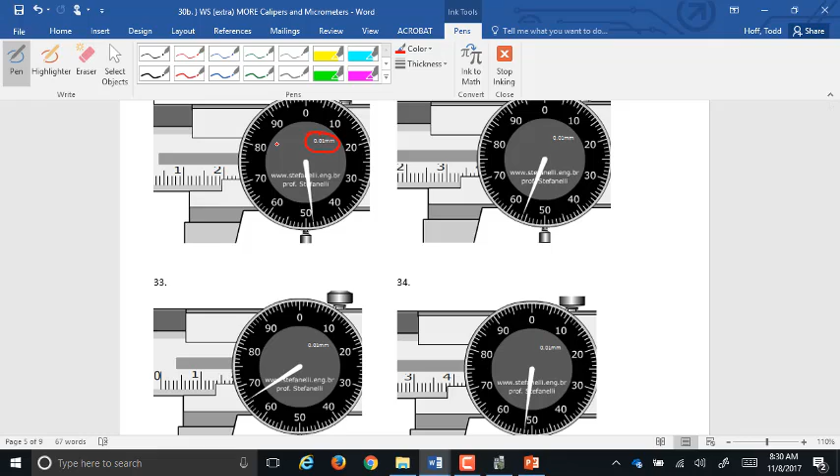Now remember, the tricky part about the metric caliper is that is not 1. What does that really stand for? 10. So here's our reference edge. That's where we're reading that main scale. That's 10, 15, 16, 17, 18, 19. So that's 19 whole millimeters.

And I don't know what just happened there.

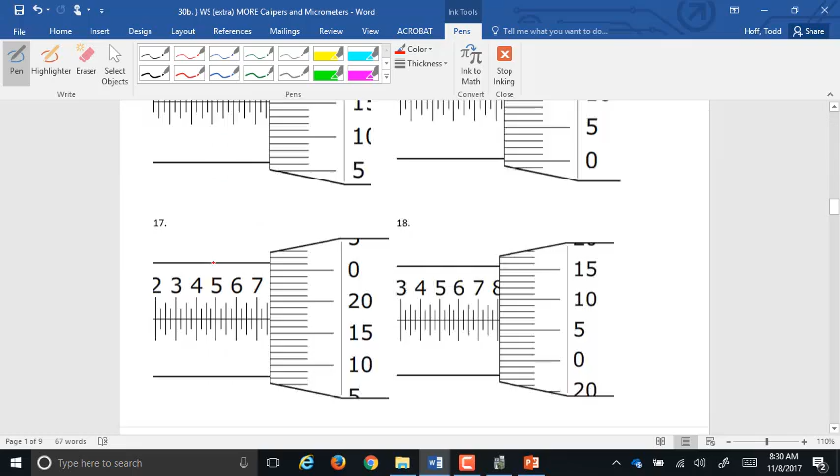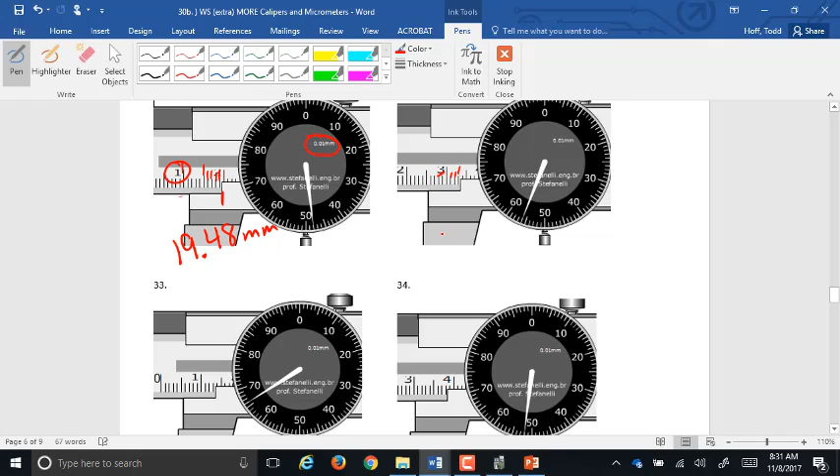19 whole millimeters. Point. What does it say on the dial? 48. So 19.48 millimeters. So this second one, that's 30. 1, 2, 3. So 33. Point, the dial says 56. So 33.56 millimeters. How about this one down here, number 33?

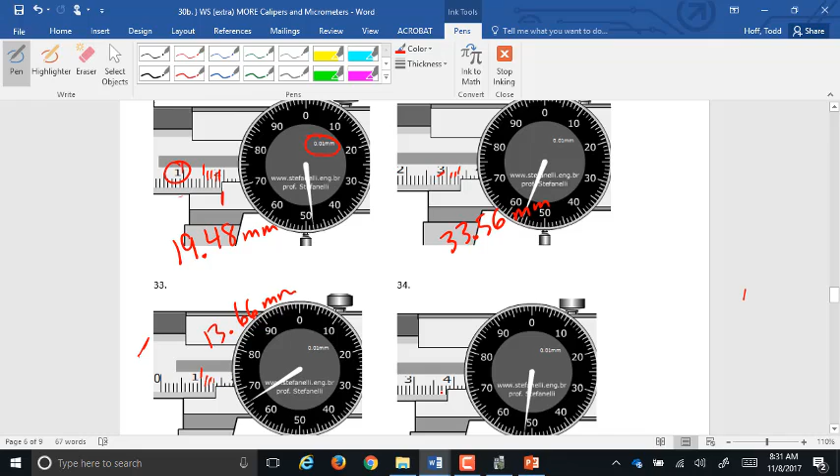13.66. Perfect. This is 10, 11, 12, 13.66. 34? 38.52. Perfect. Well, then we're going to move down a bit. Now you can probably guess that these are not metric anymore. These are inches. That says, again, if you can see it, 0.001 inches is what that says. I'm going to give you guys a minute or so to read those four, and then we'll talk about them.

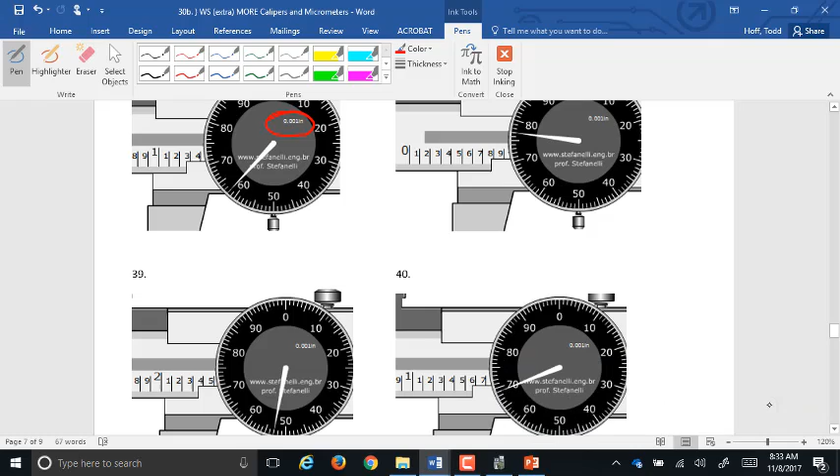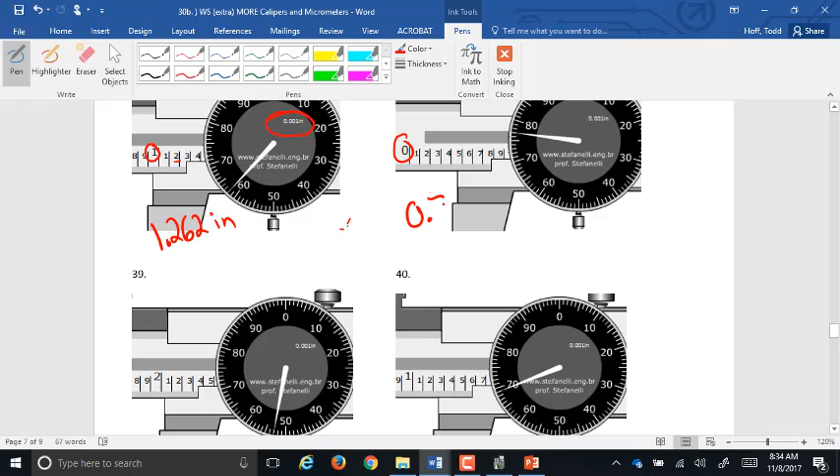So for the first one, reading in whole inches, this is 1 whole inch, point, that's the tenths, 2, and then the dial says 62, so 1.262 inches. Over here on the second one, how many whole inches? 0. Point, past the 7, and then 77, so 0.777 inches.

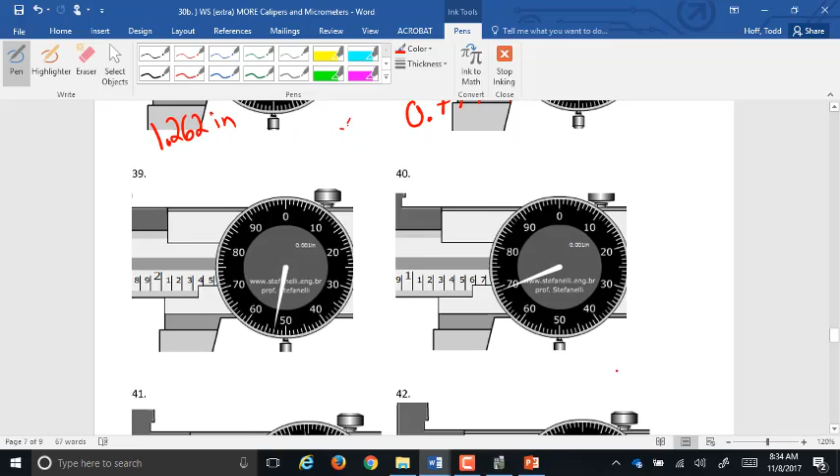I'll put these up so we can see them a little better. Oops, that's the wrong direction. Okay, so number 39 here, how many whole inches? 2 whole inches, 2.353, so 2.353 inches. 40. 1.5 and then 69, so 1.569. Any questions on reading those calipers? Okay.

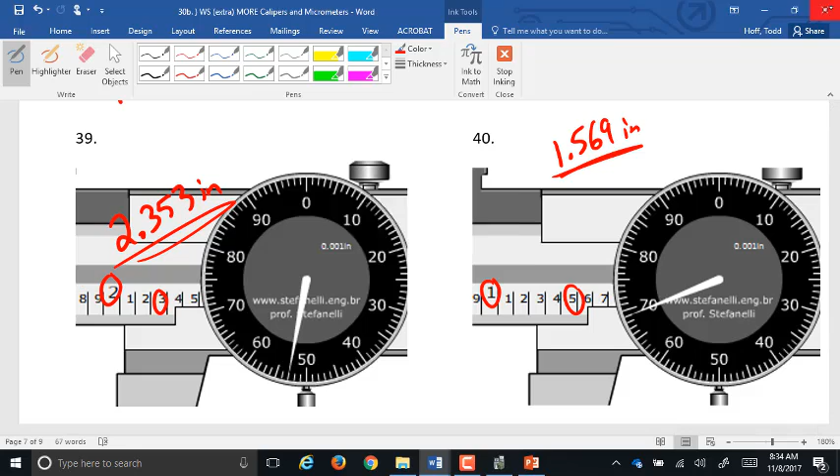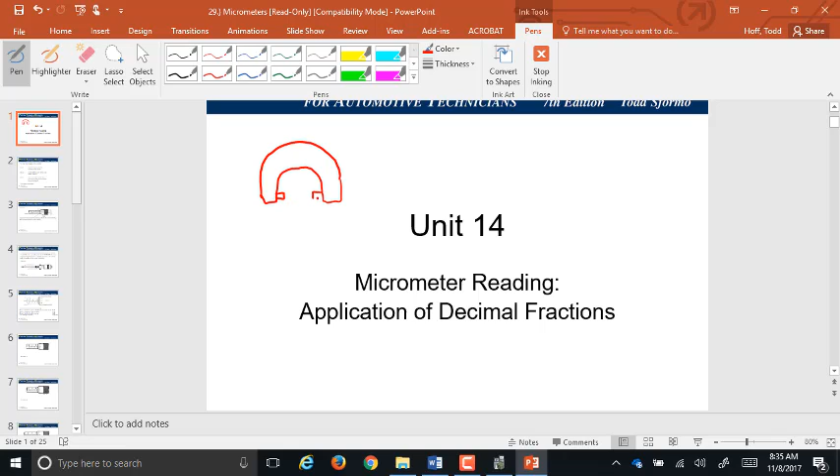Well, today then we're moving on to reading micrometers. Micrometers are kind of like a big C-clamp. Don't use them as that, it's not good for them. They look something like this. That's what our micrometer looks like. We have the jaw or the arm of the micrometer up here. This is stationary here. This part moves in and out as we turn the part out here. This out here has 2 pieces to it.

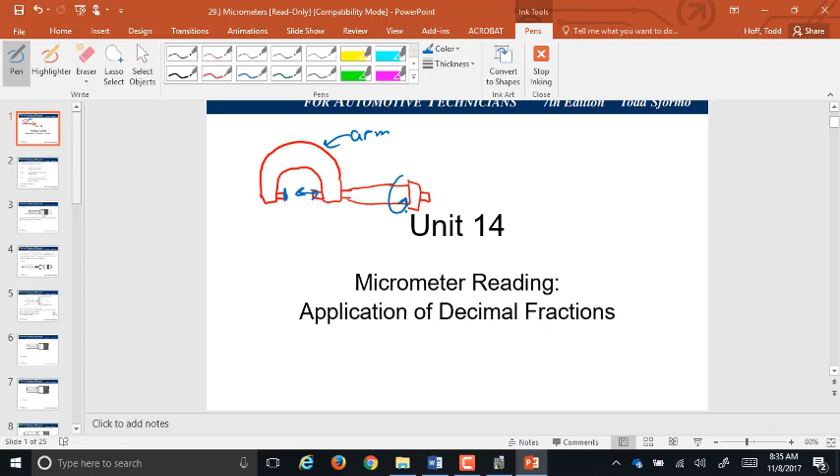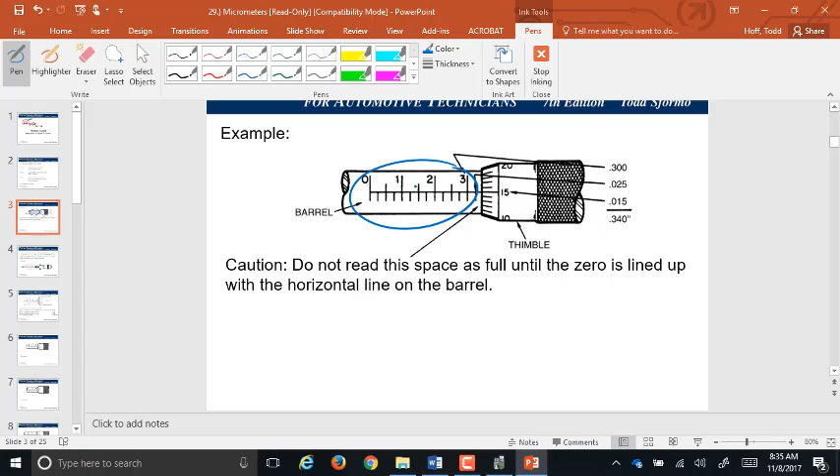There's the barrel. Oh, we can do this. There's the barrel, which is this part here. That stays stationary. That's going to lock onto the jaw, onto the arm. And then the thimble is this part here. That's the part that actually spins. As that spins, it slides in and out on the barrel. And as it spins, it moves this piece in and out as well.

So there are going to be 2 measurements we need to take here. We get part of our measurement. Actually, technically, there's 3 measurements we should take. Most of these are labeled 0 to 1 inch, if I'm looking at an inch micrometer here. That 0 to 1 inch means that this will never measure anything larger than an inch. Now there are going to be some that say 1 to 2 inches and 2 to 3 inches, and we'll talk about that in a little bit.

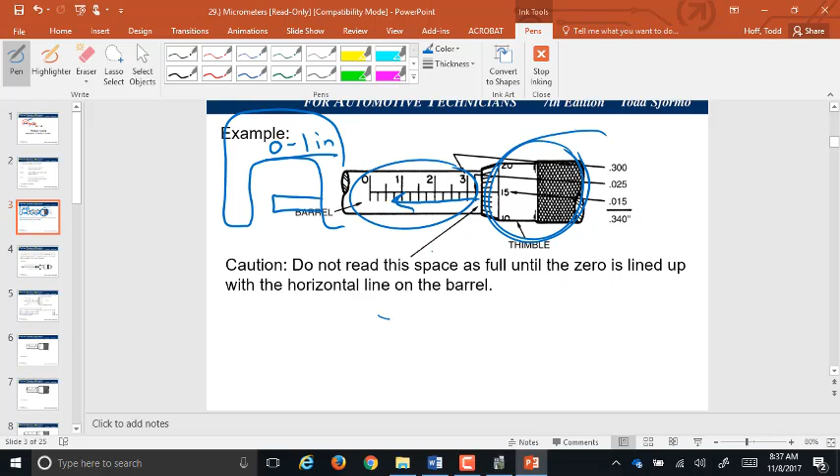This thimble, when we turn it, it moves in and out. One full turn is a 40th of an inch. So you have to make 40 complete turns to move an inch. Because of that, it's very slow to move it in and out, and they almost never have them with more than 1 inch of travel in them. So this will almost never be more than an inch. I have seen some that go 2 inches, but they're extremely slow. In fact, one of them I saw actually had a crank on it to turn it faster. Most of the time, they only have 1 inch of travel because of that slow movement.

Now, like I said, this one is a 0 to 1 inch, which means it would close tight here, and it would open up as far as 1 inch. If I had one that was labeled 1 to 2 inch, what that means is when it's completely closed, there's still a 1 inch gap here. And if it were totally open, it opens as far as 2 inches. So it's only able to measure things that are larger than 1 inch and smaller than 2 inches. And then, of course, they have 2 to 3 inch, 3 to 4 inch, and so on.

We take the first part of our reading off of the barrel. We read it at the edge of the thimble. Now, remember, we said this is 0 to 1 inch, so these numbers are not whole inches. Those are tenths of an inch. So this here is 0.3 inches.

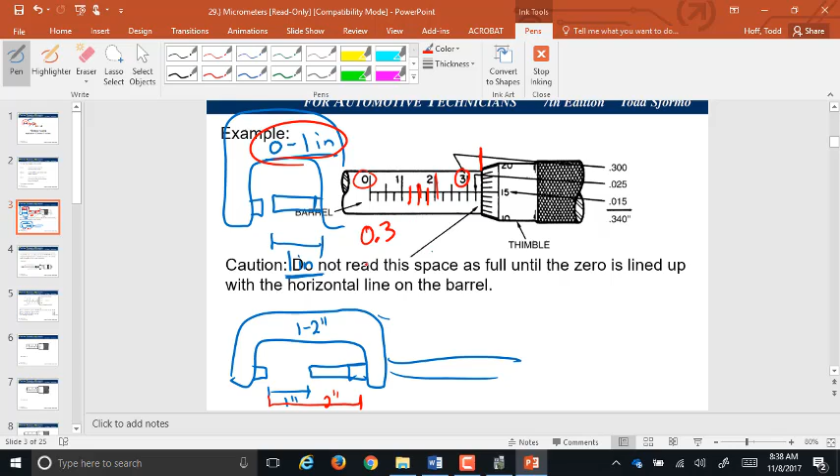Now, we looked at that vernier caliper just a little bit yesterday. That vernier caliper had quarter marks, the 3 marks in between the tenths. All inch micrometers have those quarter marks. What that is saying is this is 25 thousandths, 50 thousandths, and 75 thousandths. So here we have passed the 3 tenths. We have passed one of those quarter marks. That is 25 thousandths. So that's 0.3 and then 25. That's what we read off of the barrel.

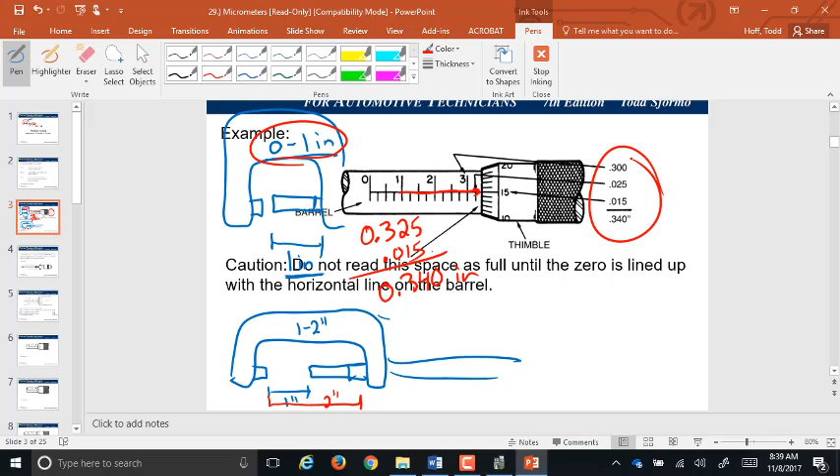Then we read the thimble. The thimble gets read where it lines up with this axis of the barrel. Right now you can see that's a 15. That's 15 thousandths. You would add that up, you get 340 thousandths of an inch, just as they did over here. So let's practice some of these.

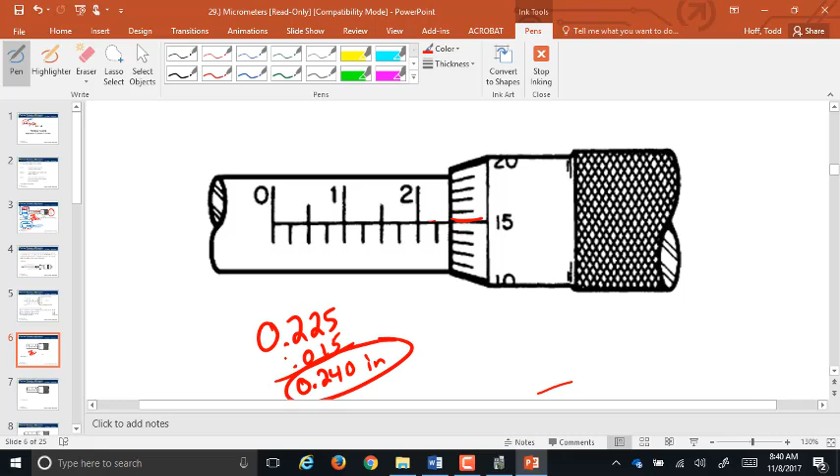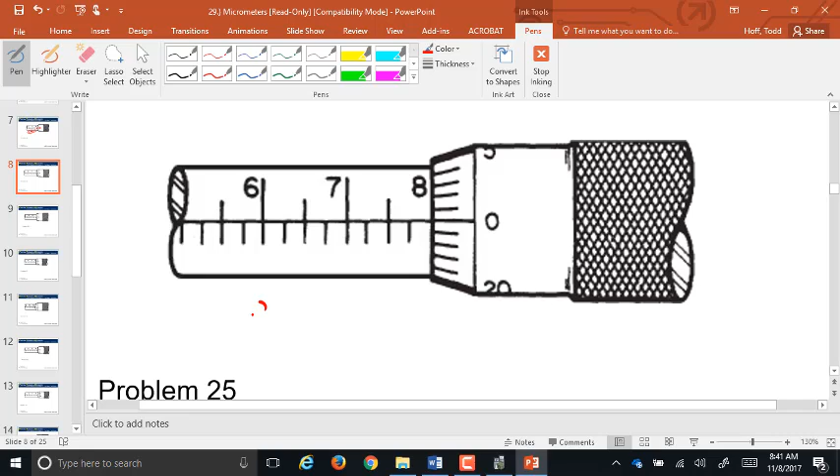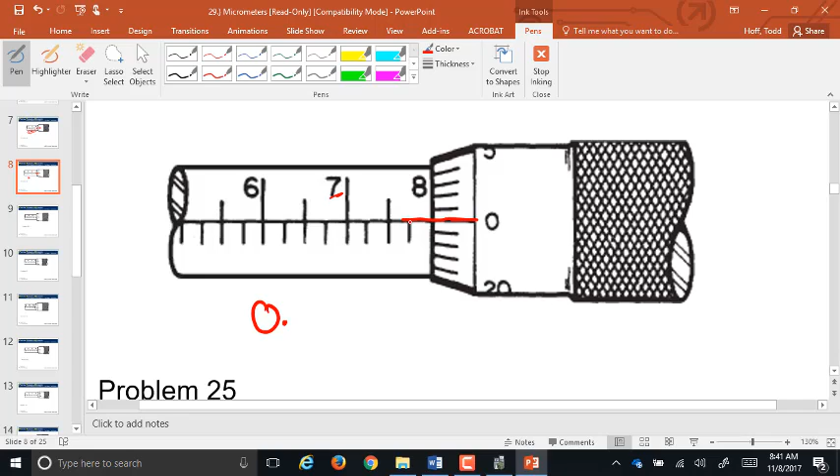So here, 0 whole inches. Now we're obviously past the 7. Have we made it to the 8? Well, once again, we're exactly on 0 here, so that means we're at one of the lines, so we must be exactly at 8 tenths, 0.8. Do we need these zeros on the end? Yes, we do. So that whoever is reading that measurement knows that we really did measure to the thousandths of an inch, and it happened to come out closest to 0.8 to the nearest thousandth.

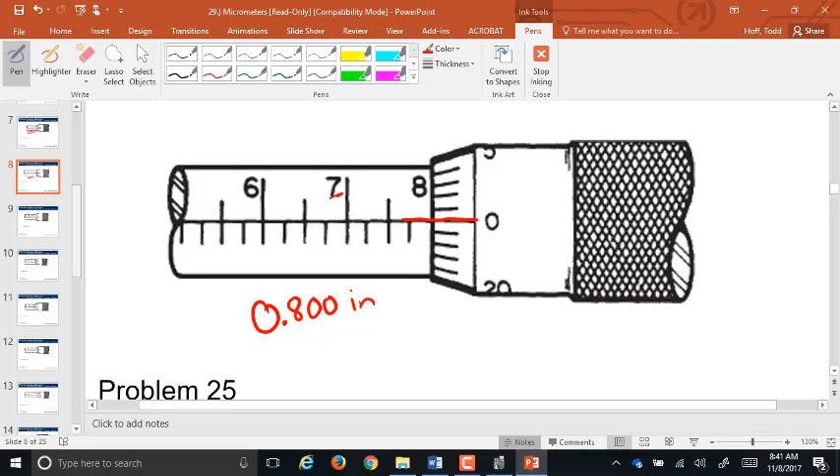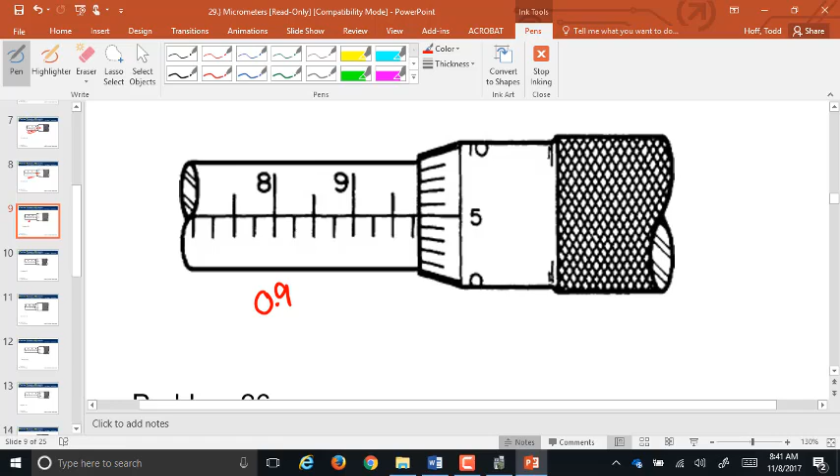Okay, let's make them a little more interesting here. This one, how many tenths? So 0.9, and then 25, 50, 75. So 0.975. And then we read the thimble at what? 5 thousandths, 0.005. So we add that up, that's 0.980 inches.

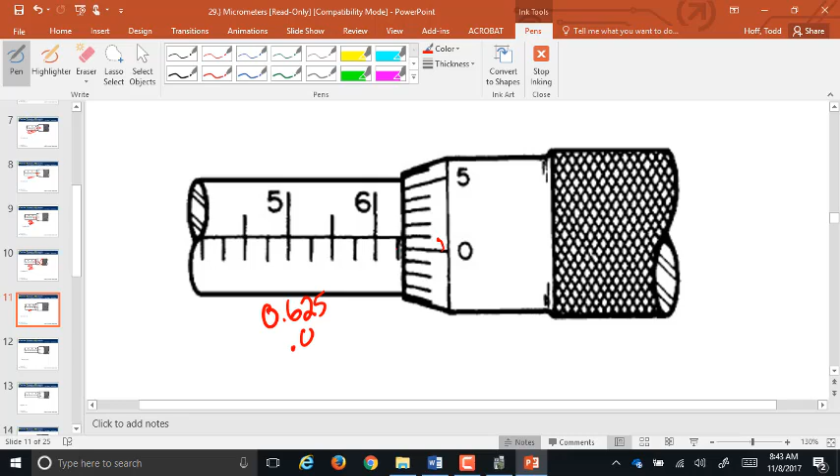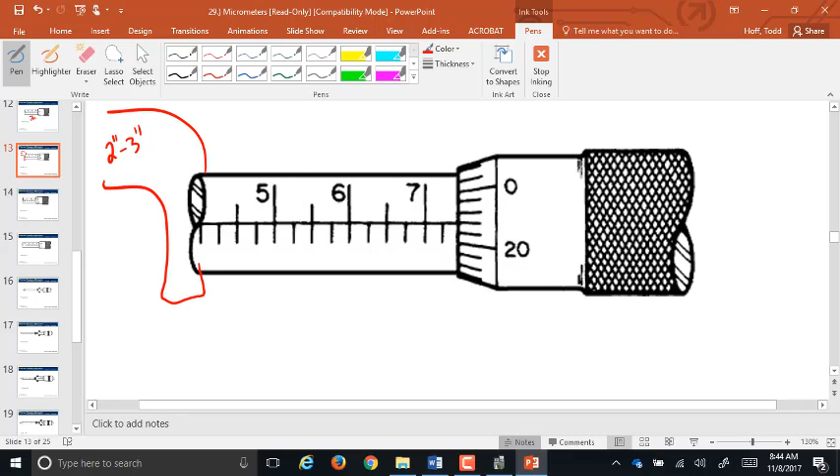Now in this one, I'll say it's labeled 2 inch to 3 inch. So what that means is our measurement starts out as 2 whole inches. Then we read how many tenths? 7, 25 because we're past a quarter mark. Then off the thimble, 22 thousandths. We add that up. It's 2.747 inches. Now remember, the 2 only comes from the fact that I told you it was a 2 to 3 micrometer.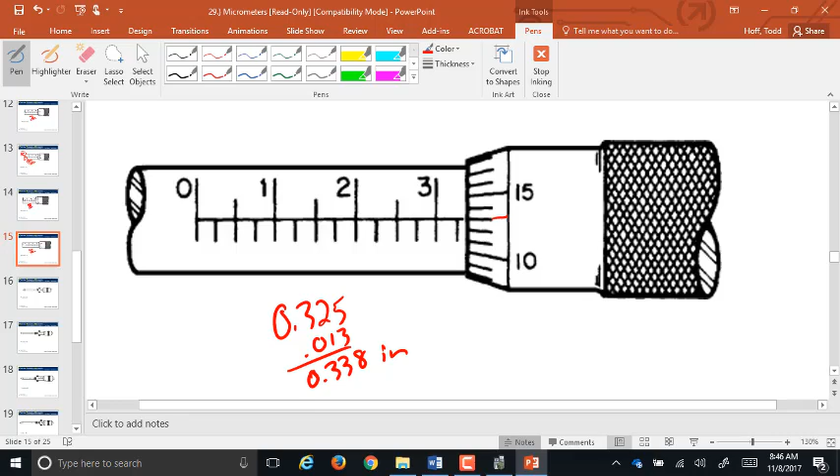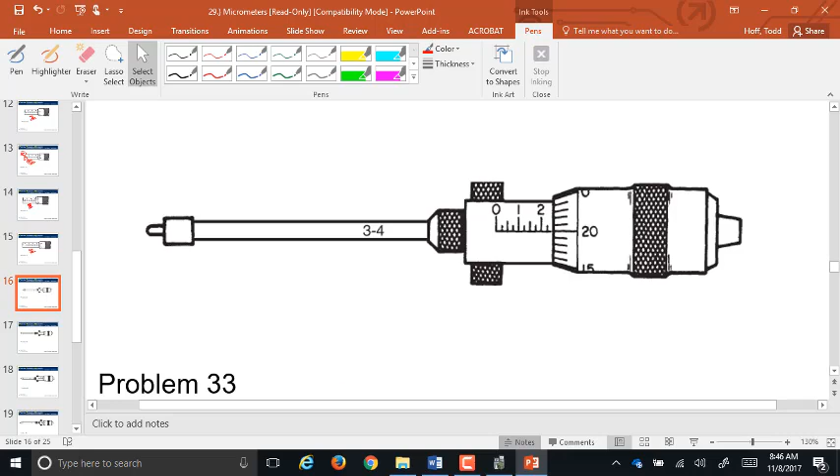Now the micrometer, because of its structure, can only measure outside dimensions, outside diameters, with a standard micrometer. The caliper, if you remember from yesterday, had 4 different ways it can measure. It can measure outside, inside, step, or depth. To measure inside dimensions or depths, we do have an inside micrometer. Now, the inside micrometer, you'll notice, first of all, it has this on it. That is an extension. That 3 to 4 inch extension means that any measurement I take with it is going to start at 3 inches. What's that?

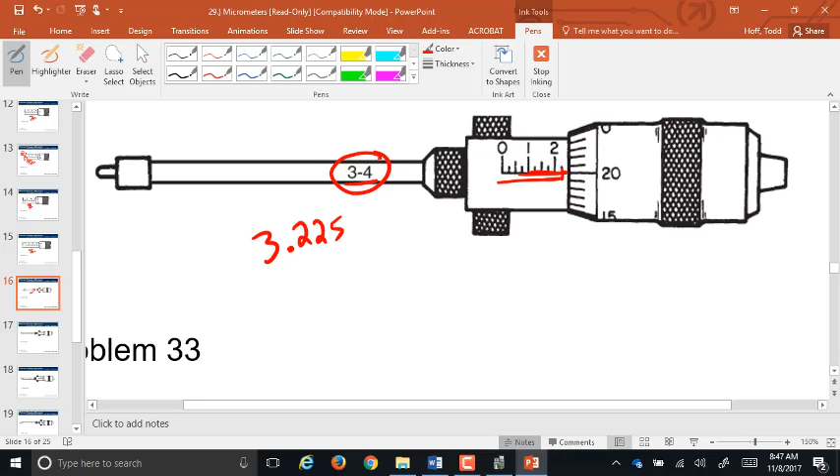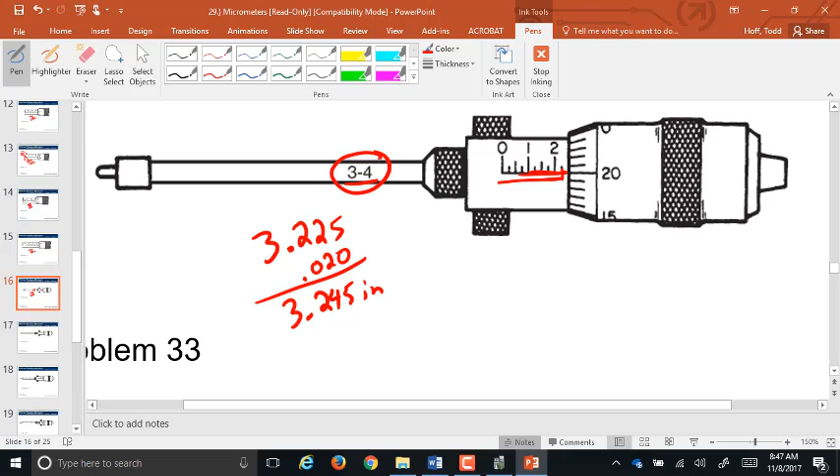Then we read the main scale the same as we always have. That is 0.225. And then we read the thimble. What's lining up on the thimble right now? 20, so it's 20 thousandths. This is 3.245 inches is the depth that's reading. Now this one you'll see looks similar, but slightly different. I'm going to flash back. What do you see that's different between these two?

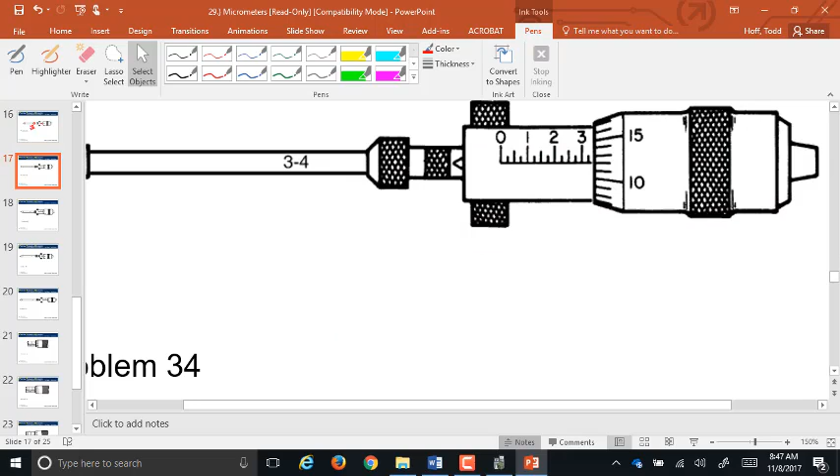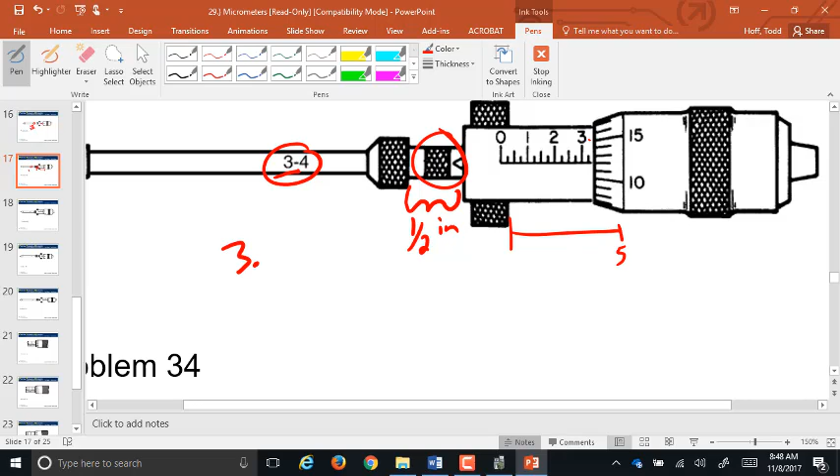It says 3 to 4 inch, but there's this piece here that isn't there, is there? That is a 1/2 inch extension. On an inside micrometer, in order to keep them smaller and shorter, there's only a 1/2 inch of travel. This would only go up to 0.5 here. So this is saying this is 3 inches and a half. So this one starts out at 3.5 before we start reading the barrel and the thimble. So that means we're going to have to do a little bit more addition here.

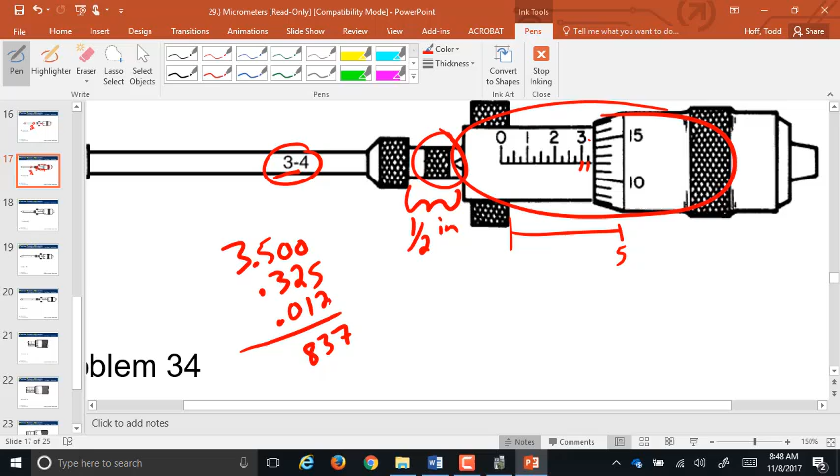What does my barrel read? 0.325? What's my thimble read? 12 thousandths, so 0.012. So then I add up, I've got 7, 3, 8, 3. So 3.837 inches. Any questions?

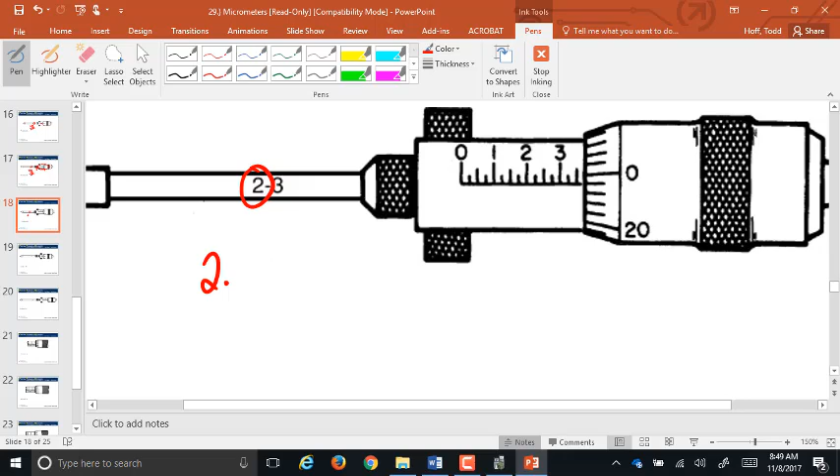So on this one, where do I start? 2 whole inches. Yep, 0.350. Then on the thimble, that's 21, 2, 3, 4. 24 thousandths. 2.374 inches.

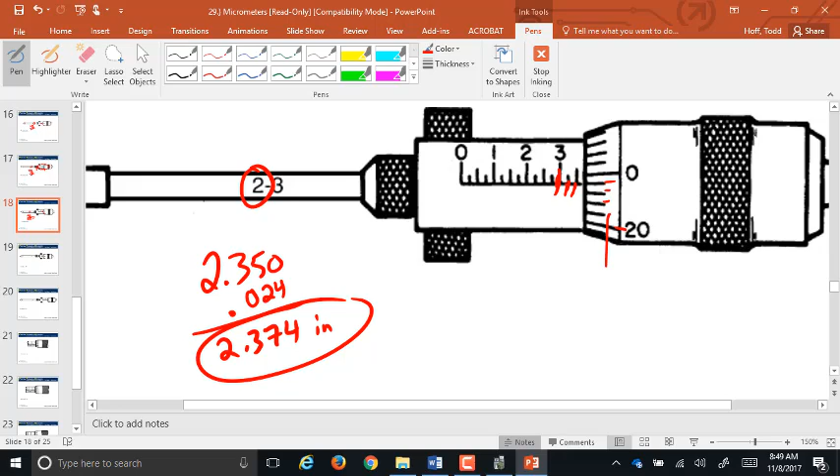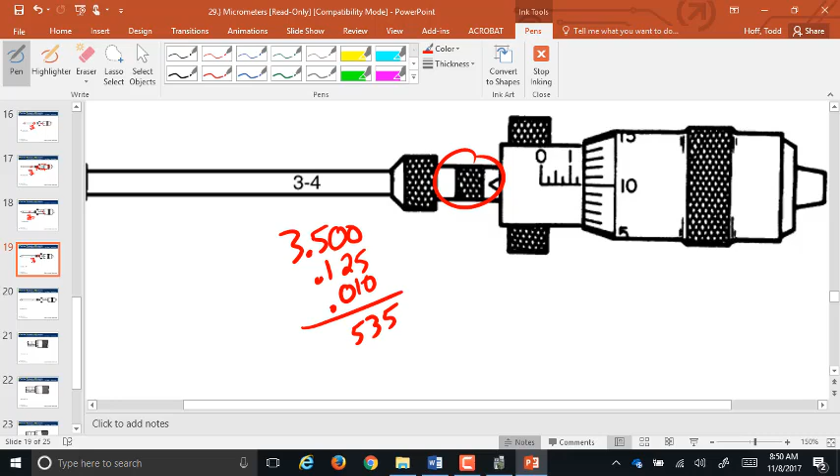How about this one? Where do I start? The 3, and that's an additional 0.5. Then what? 0.1, and it is just 25 again off the barrel. 10. So, oops, that should be a 6. 3.635 inches is what that's reading. Have a try at this one on your own. We'll talk about it in about 20 seconds.

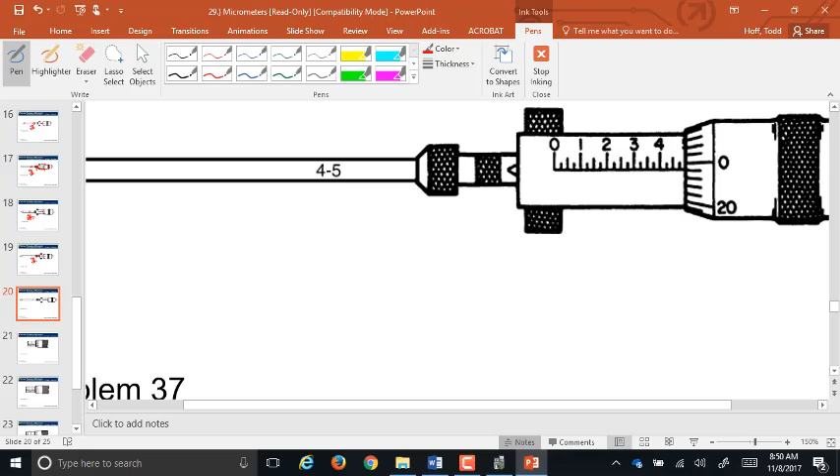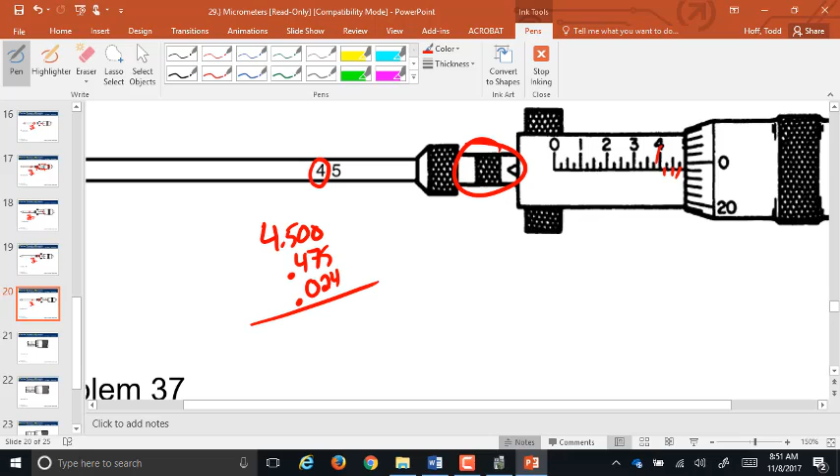So where do we start? 4.5, yes, this is the 0.5 because of the 1/2 inch, yep. Then what? 475, very good. This is the 0.4, 25, 50, 75. And then what? 0.024, 24 thousandths. So that's 4.999 inches.

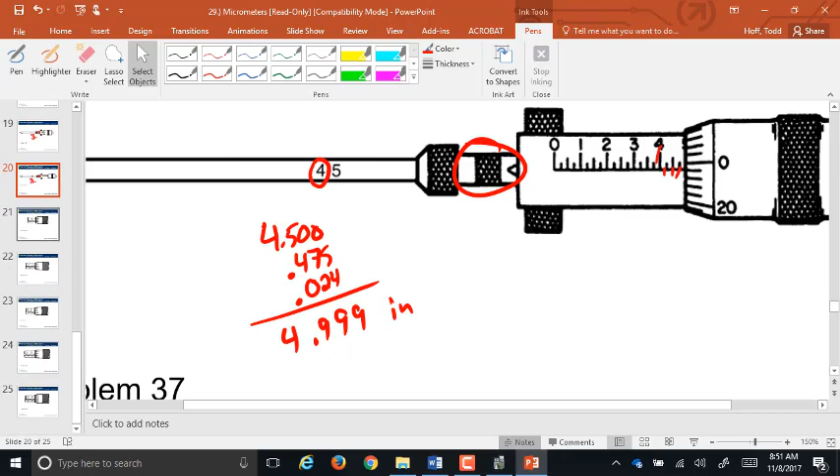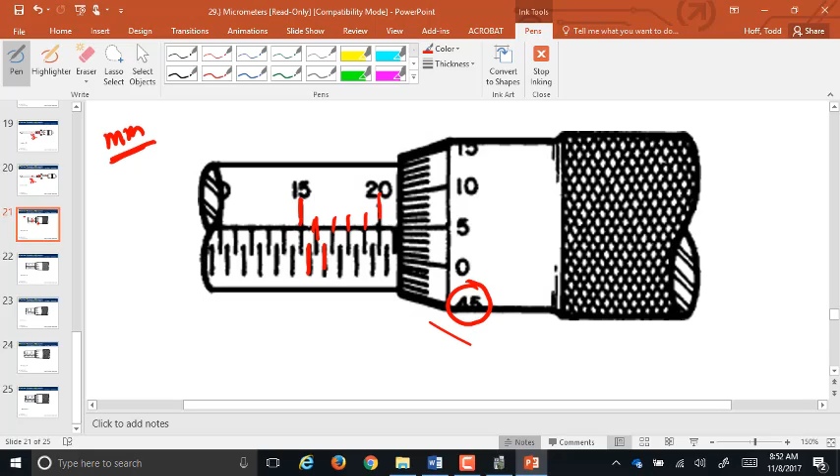You'll notice here, this is 15 millimeters. This would be 16, 17, 18, 19, 20. But you'll notice there's these additional marks in the middle here. Those are the half marks. So this is 15, 15 and a half, 16, 16 and a half, 17, 17.5, 18, 18.5, and so on. So as I'm reading this one, this mark here is the 21 millimeter. Have I passed it? Yes, because I've just passed 0. There's 21 whole millimeters.

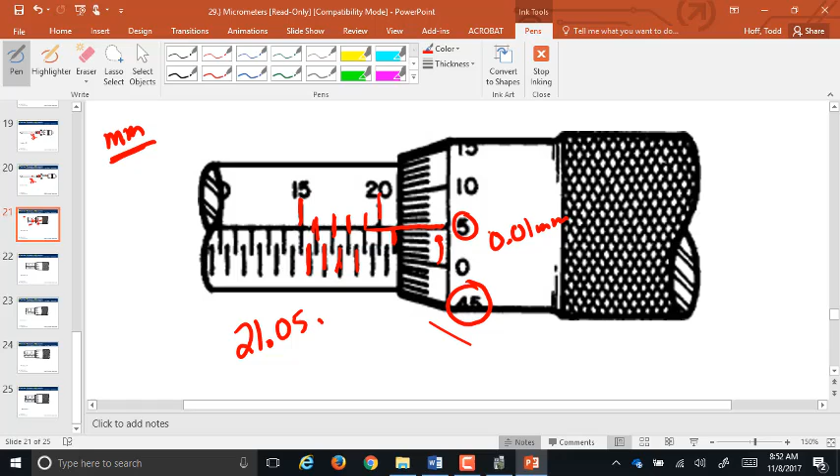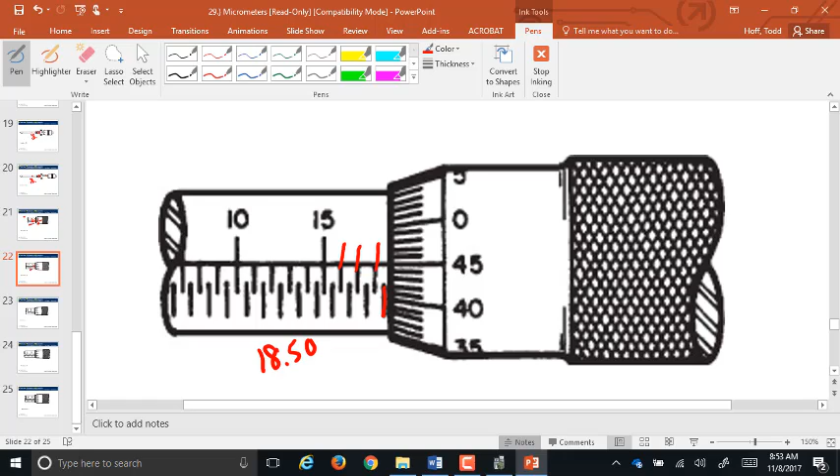Then what do we read on the thimble? 0.05. Very good. Because that is in hundredths of a millimeter. Even though that just says 5, it's 0.05. It's 5 hundredths of a millimeter. How about this one? Well, it's 15, 16, 17, 18.5. So 18.5, yes, and then plus 0.45. So that's 18.95 millimeters.

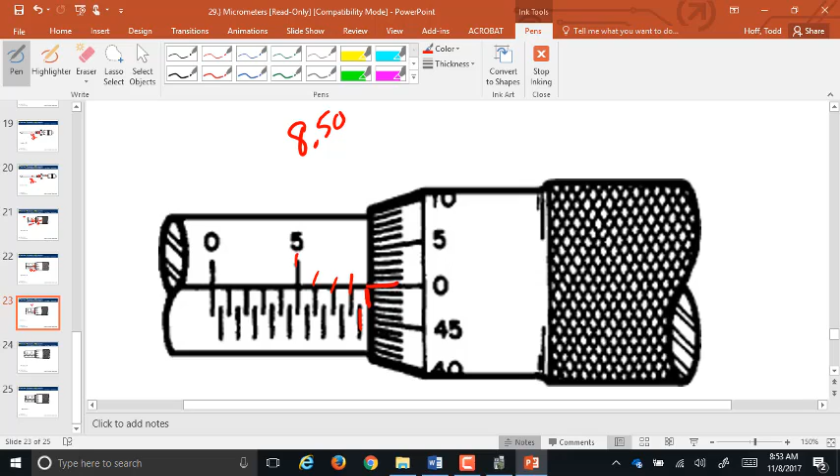How about this one? 5, 6, 7, 8 and a half. But this is at 0 here. So that's telling us we're clearly past the 8 and a half. We're not right on 8 and a half. So we have to be right on 9 is what that's telling us. And yes, we do have to write that as 9.00 millimeters because we are within a hundredth of a millimeter.

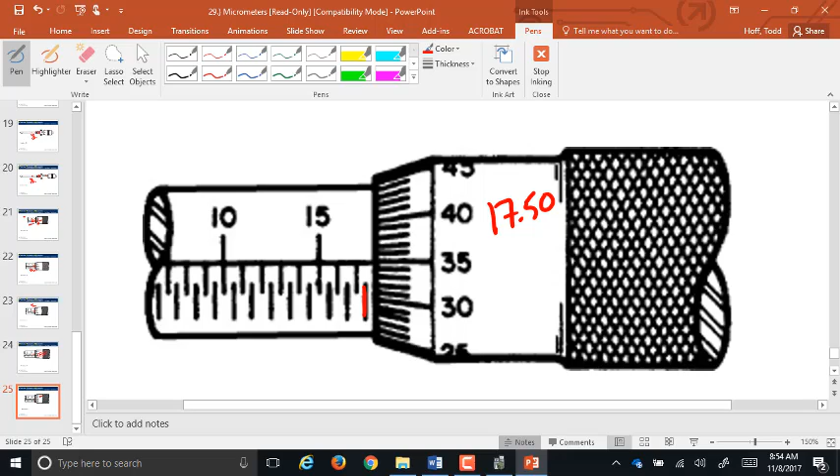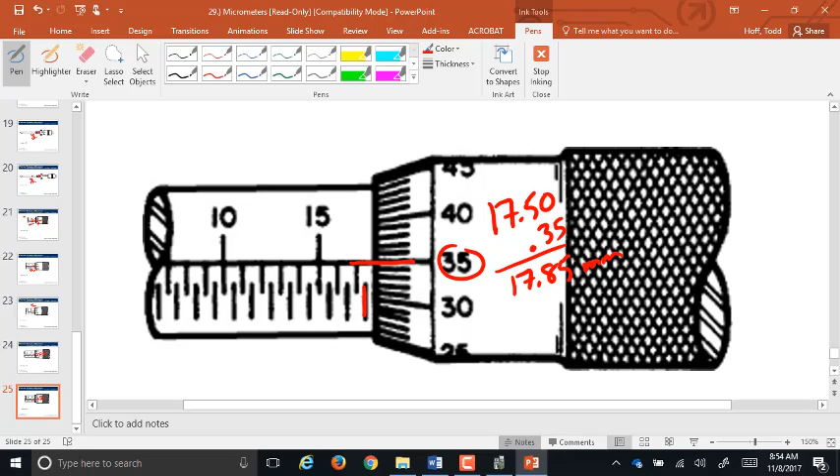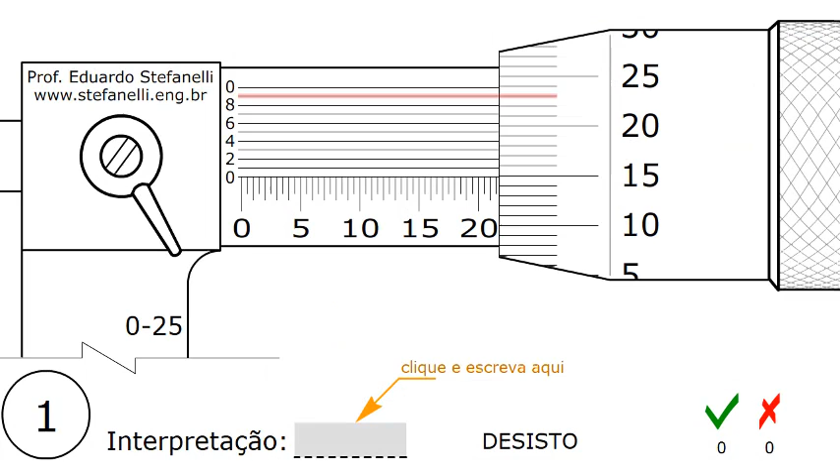I have no idea which one this is going to be, but we're going to try it. Quiz. Whatever the quiz. Oh, come on now. A little bit. There we go. So let's do... that's not the one I want either. How much you want to bet? I'm going to check 4 of them. They're all going to be the quizzes. Oh, there's one I'm looking for.

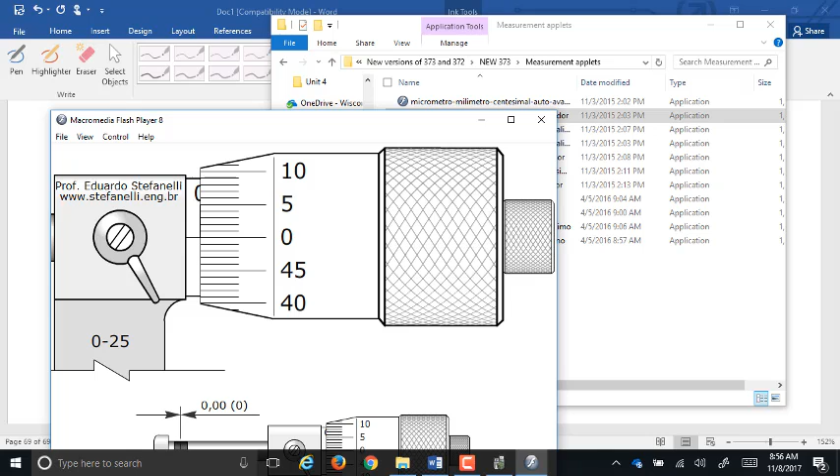Okay. First of all, metric or standard? How can you tell it's metric? It goes up to 45 and back to 50 here before it hits 0. Also, oops, come on. If I roll this out, you can see why they don't have a lot of travel. It's just as slow on a real one. It all depends on screen resolution.

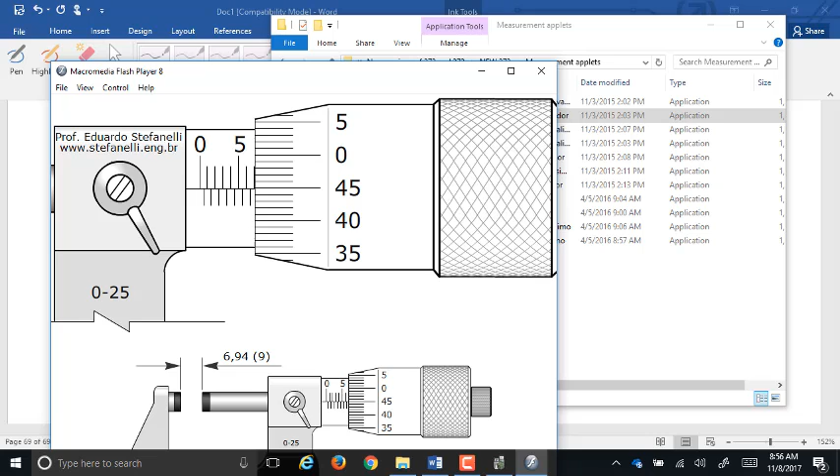So here, I am currently at... have I made it to the 7? No. It's 6.5, right? I probably should do this so you can't read the little thing down there. This is 6.5, and then this is between 44 and 45. I go to whichever one it's closer to. It's closer to the 45, right? So 6.5 plus 0.45 is 6.95. How about here? 7.5 plus, I'm between 8 and 9, closer to the 8.

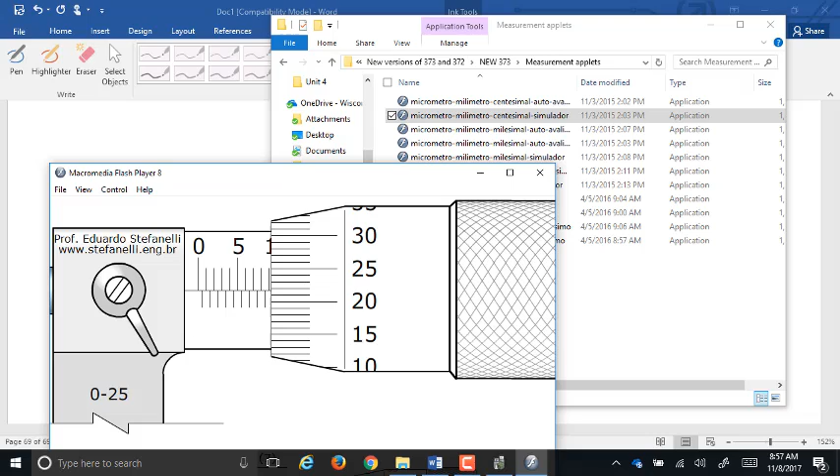On your standard micrometer, whether it's an inch or a millimeter, by standard I mean it doesn't have the extra scale that we're going to see in a little bit, you can go to the nearest marking on the thimble. So I'll read the barrel here. This is a little bit less obvious. 6, 7, 8, 9, right? And then this is between 21 and 22. It's closer to 22. So that's 9.22.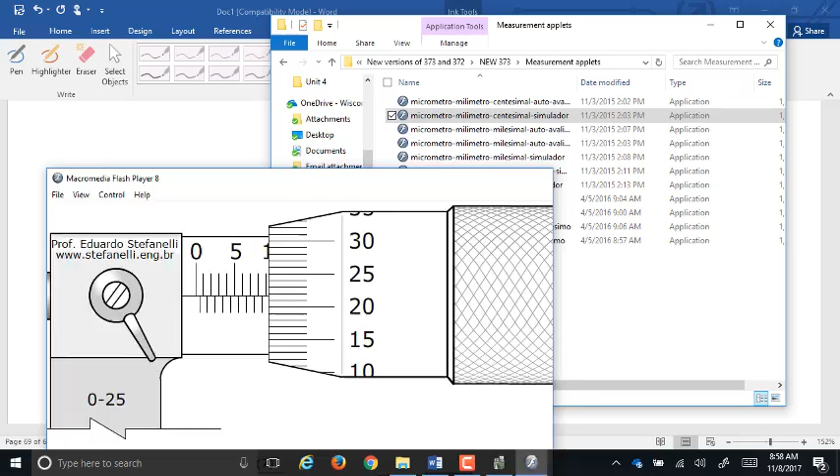Well, they're saying 9.217. I'll explain why. This applet's actually designed to be vernier. It has an extra digit on it. You just can't see it on this application. On one without that extra scale, which is what we're going to be using pretty much, you go to the nearest marking here on the thimble. We can, however, run into ones... maybe we can run into them.

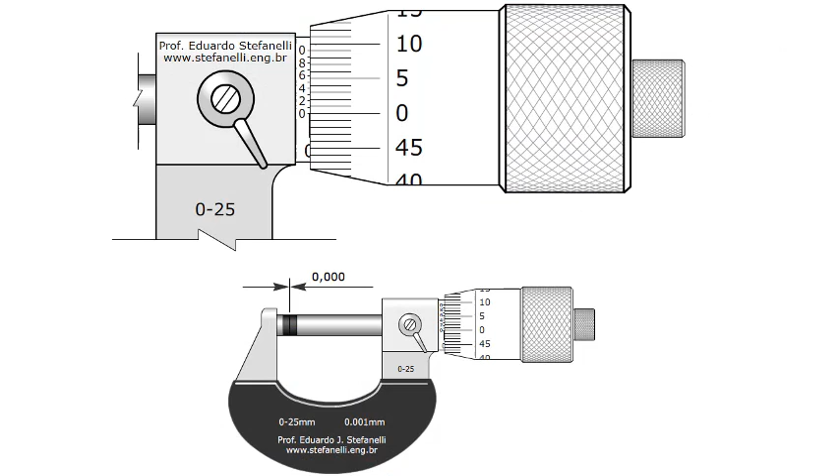Okay, here's what I'm talking about. You'll notice, I know they've got a little cheat on here, but this is still millimeters because it still goes 45, so it goes up to 50 before it wraps back to 0. And it is still labeled. I can open it up far enough. You can see the barrel is still labeled in 5s.

But you see these extra numbers up here. What that is, if I look at this, you can see right here, I am between the 3 and the 4, aren't I? Well, this is a vernier scale that tells me how far I am between the 3 and the 4. Right now, this is 6.5, right? 6.5 plus, when there's this extra scale, we'll always go to the smaller one. Even though right now it looks like we might be slightly closer to the 4, we always go down. It's going to be the 3.

So 6.53, and this is telling us how far we are. The vernier scale actually lines up at 5, doesn't it? That's telling me that we're actually exactly halfway between 3 and 4. That's actually 3.5 is what that's saying. So this is 6.535. That extra digit goes on the end.

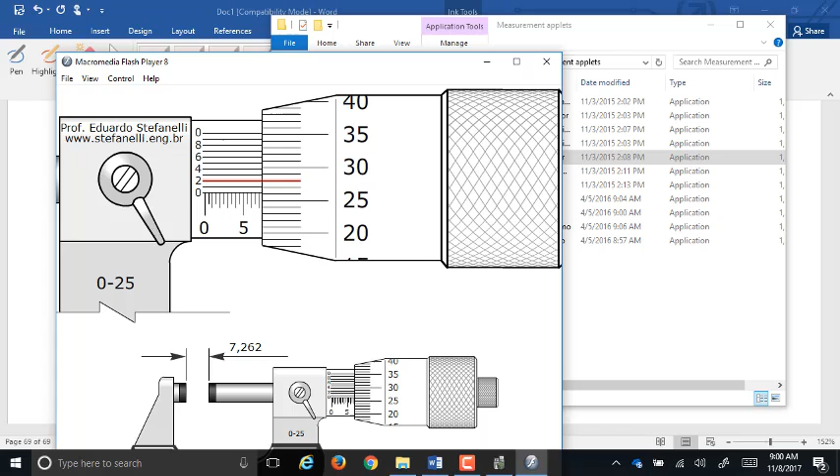So this is, move that cheat down at the bottom, 7, right? Here we are between 26 and 27. Doesn't matter which one we're closest to. We'll go to the smaller one, the 26. So it's 7.26. And then this lines up as a 2. That's just the last digit on the end. 7.262. So if you have that extra scale, that vernier scale, and you're going to be using it, you always have to go to the smaller number, and then you tack that vernier digit onto the end of it.

So here, this is 7. Have we made it to 7.5? No. So this is 7 point, we're between 45 and 46. Which one are we going to use? 45. Even though we're way closer to the 46, we have to use the 45 because we're using the vernier scale here. So this is 7.45 plus, now this thing cheats and it gives you a little highlighted line which one lines up. It's the 8. So 7.458 is what that's saying.

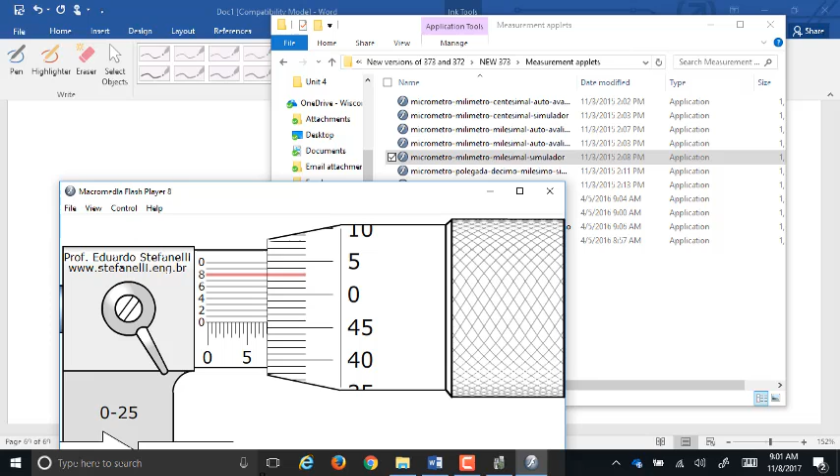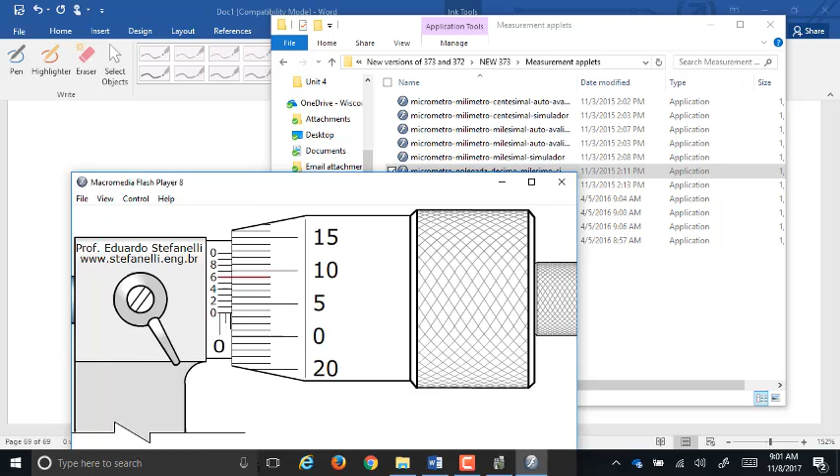We can have similar things on the inch micrometer. First of all, of course, how do we know that this is an inch? With what we can see here. Goes up to 20, then back to 25 is 0, yes. If I opened her up, oops, without flopping it off the screen, you can see it's numbered in ones, not fives.

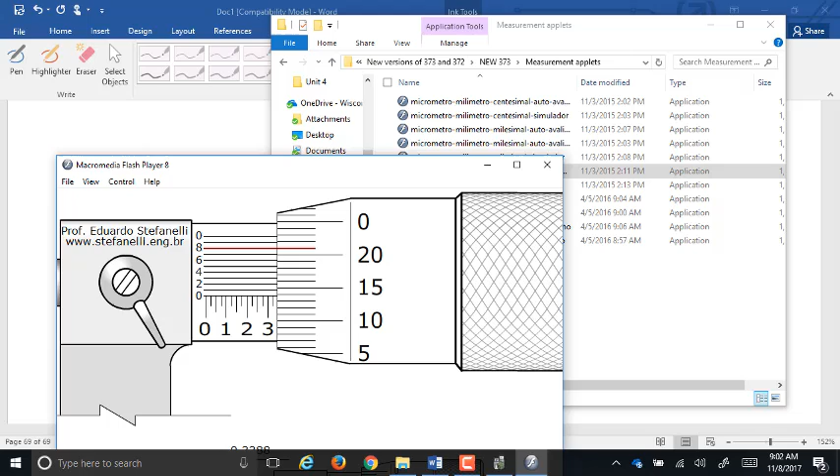Now, this is 0.325, right? 0.325. This is between 13 and 14. Even though it's closer to the 14, if this vernier scale wasn't here, we'd go with the 14 because it's closer. Since the vernier scale is here, we always go to the smaller one, the 13, and then an 8. So 325 plus 13 is 338, plus 8, so 0.3388. Does that make any sense? Well, that's kind of a mouthful to keep in your head.

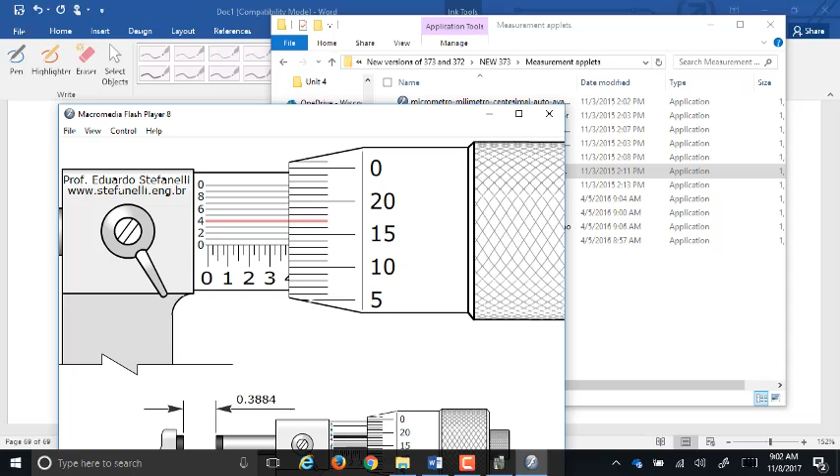So this is 0.375 plus 13, so 388, 4. That's just the vernier scale, just the extra digit that goes on the very end. Okay, I'm not going to pound those into you anymore. You guys get the picture. The key is when I switch between, I can get the right ones here. There's what I want.

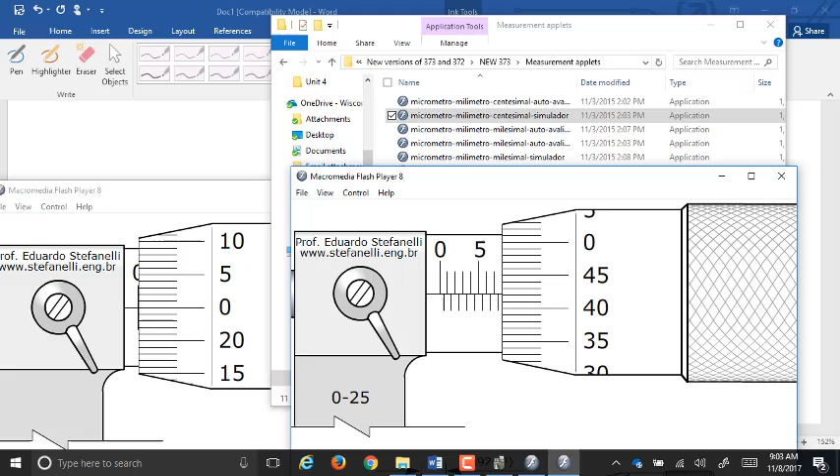Like I said, the vernier, if you guys do well on the first quiz, which might be tomorrow, we won't have vernier on any of the quizzes. If we have to go back, and I'd say 4 out of 5 classes, I usually have to go back and do a little bit more with calipers and micrometers just because that's the nature of it. If I have to go back and spend more time on them, then we do put the vernier on there, just so you know. So reading this one right here, what's this going to read?

.250, yep, plus 14. That's kind of relaxing. Going to put me to sleep. So this is 0.264, right?

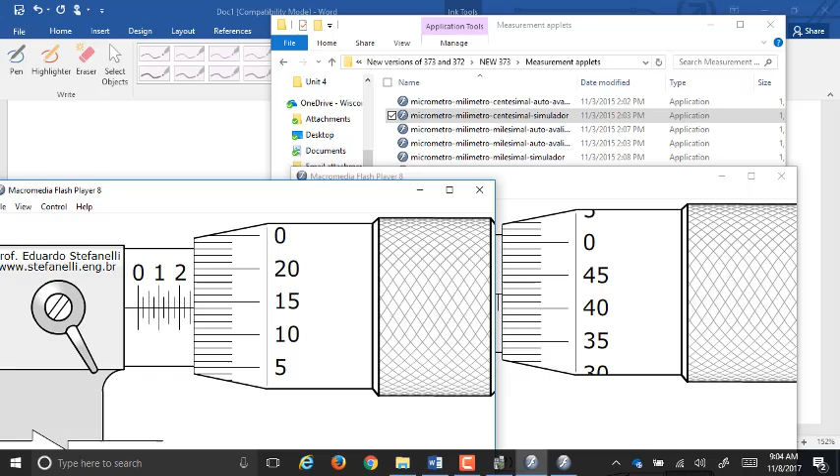How about this one over here? Sorry, I didn't mean to make fun of your ringtone. It really would put me to sleep after a little while. 7.5, and then plus 42, so 7.92.

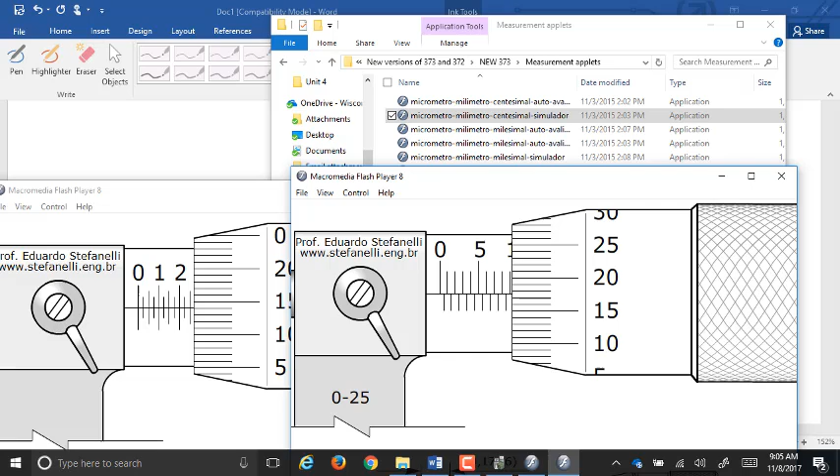How about now? Go ahead. 9.17, 17 there. 9.17. How about this one? .35. Oh. And this is closer to the 11, so I'll put 11 on as 0.361.

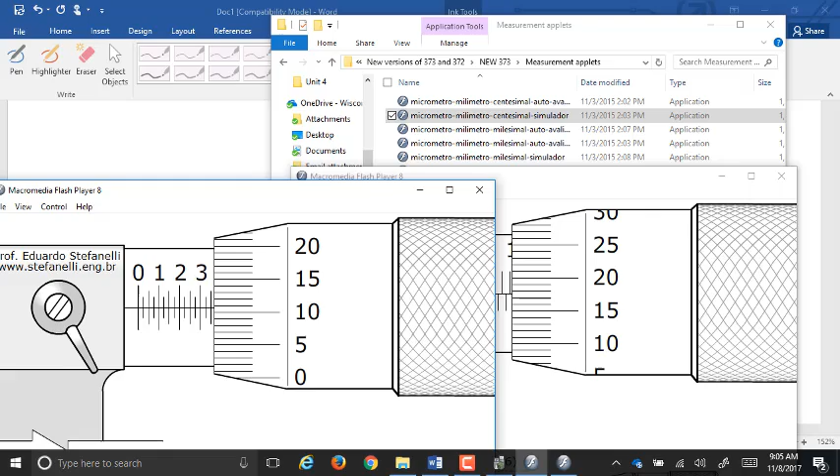So that's the biggest thing people struggle with, again, just like with the calipers, is keeping the decimal places consistent. Again, notice they use the comma for the decimal point here. That's that European standard. So what I'm going to do is I'm going to turn you guys loose. Did you guys have any questions off the packet from yesterday, off those caliper packets? Any of them you couldn't get? Just wanted you to do them for practice, yep. I see a lot of them were right off the PowerPoint, if you saw.

Okay, so then, in your book, there actually are micrometers in your book. On page 183, exercise 4.4a, and on page 186, exercise 4.4b, are reading micrometers. Tomorrow we are scheduled to do our micrometer and caliper quiz, just so you know.